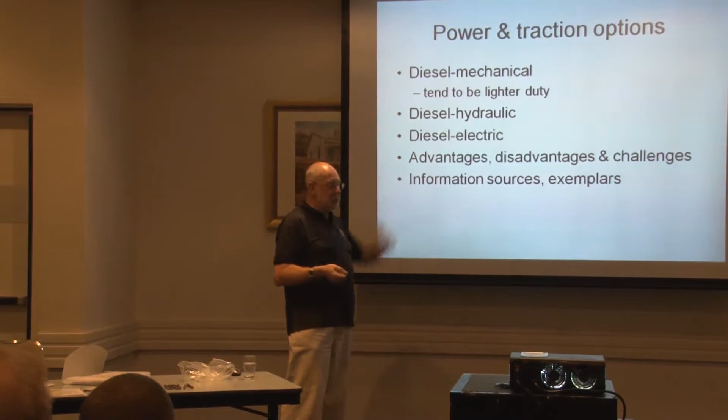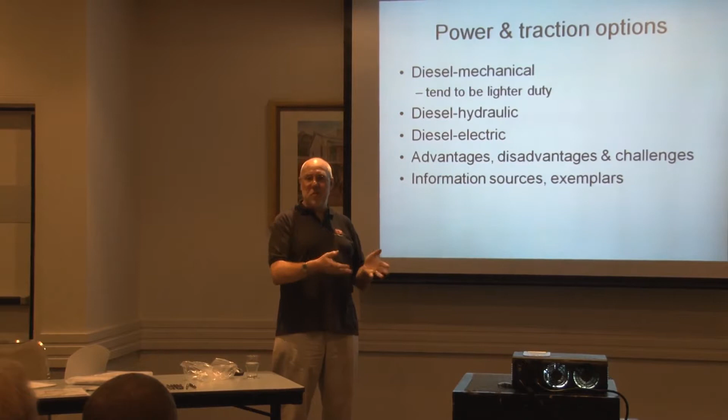On the other hand, on the diesel electric with the electric retardation, you don't have friction heating on brakes unless there's a problem with the hydraulic emergency brake. So it's one less thing to worry about usually, but if you've got fires around the wheels, you don't so much have to worry about the possibility of friction heating on the brakes, because if they've only been running on the electric retardation, there's no actual mechanical contact going on the brakes.

Okay, so some of the challenges. Well, most of the challenges are, first of all, a lot of these things are in remote areas. They're being used in remote areas. They're not accessible to normal firefighting equipment, and very often the only firefighting that gets done on these is by the water cart that has to be used on the site, and sometimes even that isn't applicable because tyre fires are a big hazard with these things, and once the fire gets into the tyres, it's in danger of explosion.

The beads come off these tyres, the big iron beads that go on the wheels, they can go like 300 to 400 metres and kill people. So they usually have a 400 metre or so exclusion zone around it. Once the fire progresses to that stage, they just let it burn out. So immediately we then have a disadvantage or a challenge for the investigator, and the damage is a lot worse than it might otherwise be.

A second challenge very often is the sheer size of the thing. They're generally pretty big, most of these bits of equipment. So climbing around them and getting underneath them and that sort of thing is actually physically very difficult.

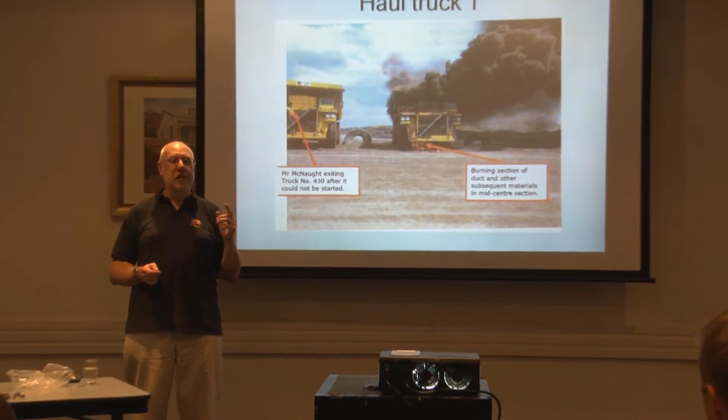What's the sort of average dollar value you're doing? Okay, the average dollar value for these sort of things, replacement cost, most of what we're looking at tonight would be in the region between $2 and $10 million. So the point is that a lot of these companies are running fleets of maybe 50 of these around the world. And if one of them catches fire here, they want to know why. Because the next thing you know they've got 3 or 4 catching fire in other places, and they've got a real problem on their hands. So that's a lot of the reason we get involved. Sorry, I should have said that earlier.

Probably the cheapest thing that you'll see tonight is a prime mover, which would come out around about 200 grand. But mostly, something like this, replacement value on one of these is about 5 million.

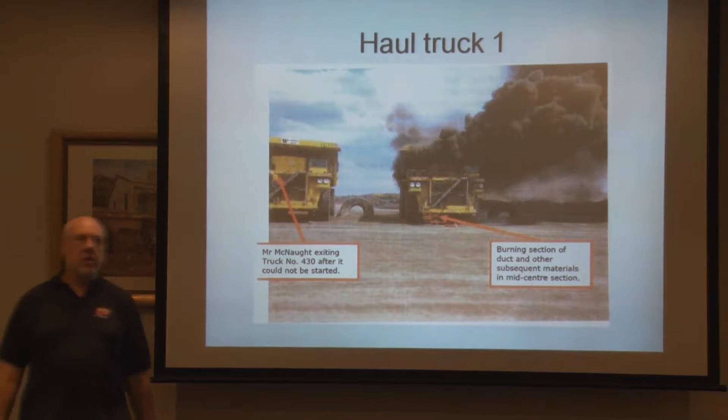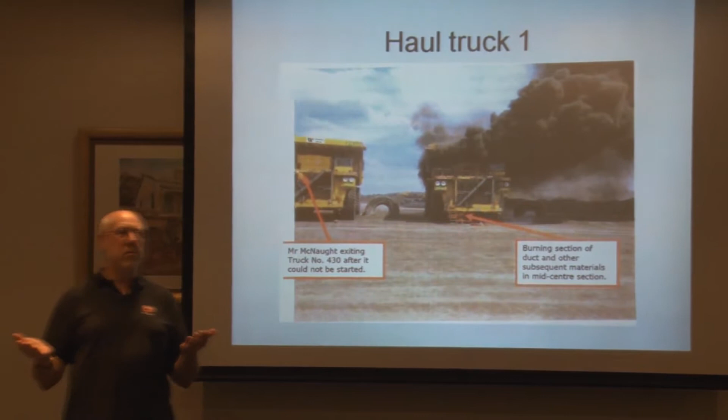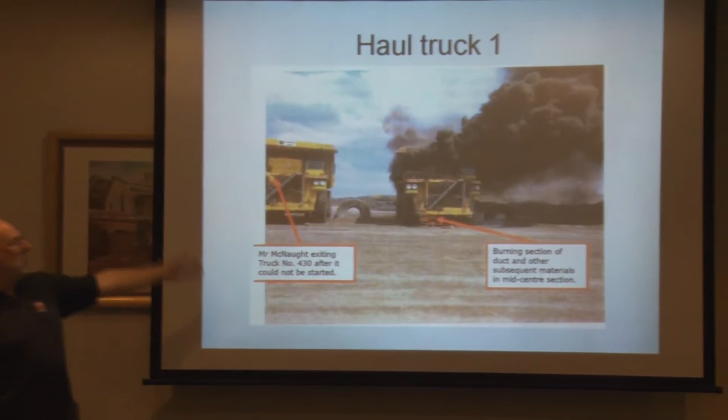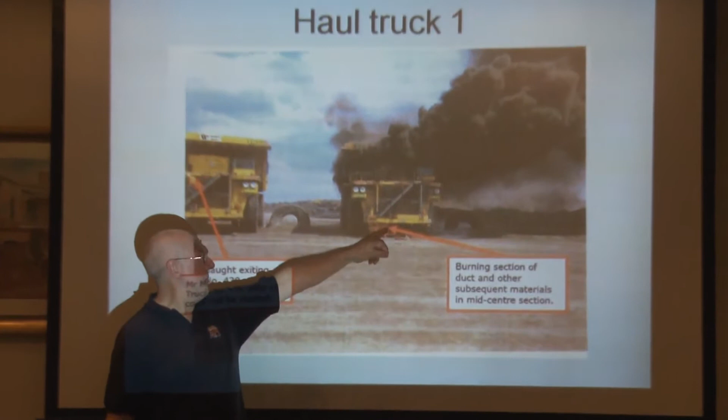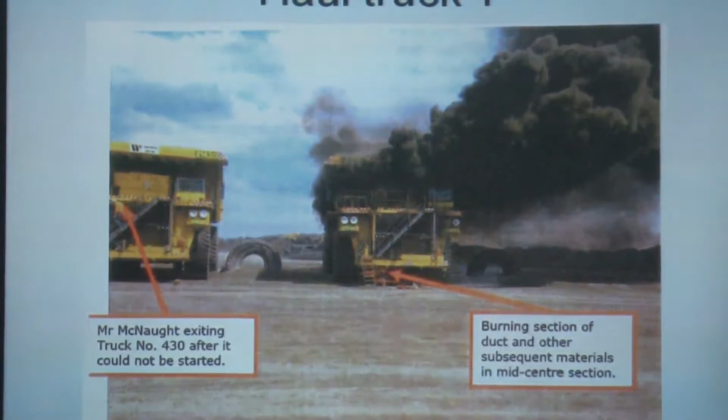This is just an example of the sort of thing that I was saying about getting early photographs. This is put out in an official report. But this photograph was taken by one of the workers on the site about 4 minutes after the fire was first seen on this truck here. I won't go into all the details there. Some of these I've been given permission to tell you about providing I keep them confidential and anonymous. So I can't tell you exactly when or where it's occurred.

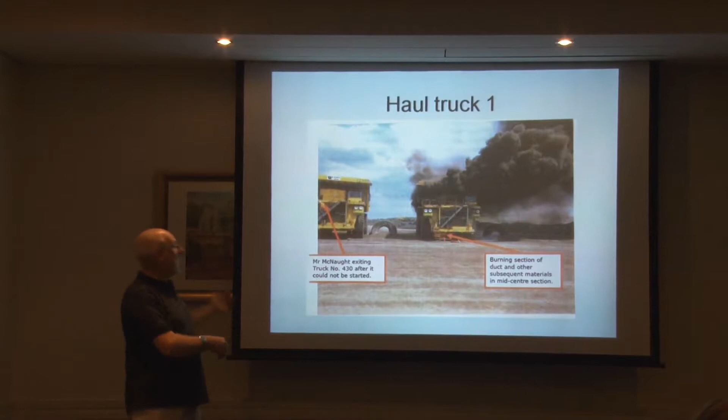But suffice to say, this is what's called a go line, which is where the trucks come up to and they stop, and the operators go on break. While they're on their break, a service car comes up and replenishes the fuel, the oil, everything else that needs replenishing, and then when the drivers finish their break, they come back, get on the truck, and they go. These trucks' buckets carry around about 250 metric tons of rock at a time. So they're a fair size, as you can see.

Now what's happened here is that half of the go line, this one here, has actually been refueled, and then the service truck has moved along to the next one, ready to refuel that one. But in doing so, and putting out hose and everything, a very small fire was seen about halfway back underneath that truck. This is the operator of this truck. He'd already dismounted once, but he went back when he saw this fire. He went back to try and get his truck to move, but it wouldn't start.

Well, there was a very good reason it wouldn't start, because the service car operator had done the right thing, which is what's called lock out. For safety reasons, when you're doing any work on any of this equipment, you have a locking out system. Individuals have individual locks. So the service car operator had done exactly the right thing, which was to lock that out. Of course, that meant he couldn't restart.

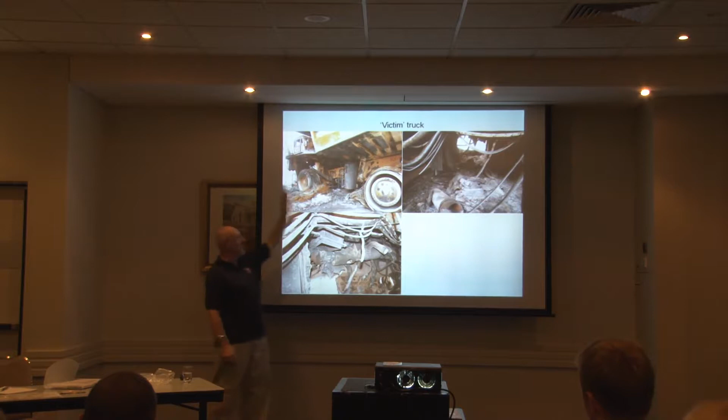This is looking up at that area there, and this here's the back of the generator, and this here is a succession of hydraulic pumps. It's actually two in a line here. This is the impeller with the remains of the shroud on it, and there's two hydraulic pumps. One of those pumps hydraulic fluid for the steering. Not surprisingly called the steering pump. I was amazed by that. And the other one provides the main power for lifting and lowering the tub. Strangely enough, that's called the hoist pump. So, having got my head around the jargon,

I was also able to look at an unburned one, and we're actually looking at the hydraulic pumps from a slightly angled view. But you can see basically what you've got is the system of pumps and pipes and joints and everything, and everything is notorious for leakage on these things. They do their best, but they're working at such high pressures. Typically, these are working at 12 to 20,000 kPa. So it's a lot of pressure.

So we were able to compare another damaged one, one that I knew had been subject to fire damage from outside. And then we went back to our origin truck. I'm cutting a lot out of the story here, as you probably know. By now I've already done 2 days work on something like this.

So this is our truck where we know the fire started. Similar angle to the other one. You can see that the external damage is not that different between the two. It's actually quite similar. But when we get underneath, it's very different. On this one, we had burned ducting but that was lying on top of this lump here, which is melted aluminium.

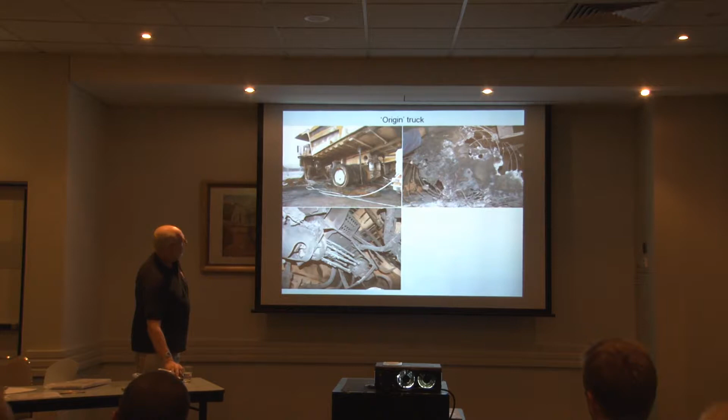So we've got a heap of damage here, which we haven't got on our victim truck. Then the question becomes why. So, cutting a long story very short, this is one of the soil samples taken from behind this truck. And what we found when we analysed this soil sample was that the ground behind this truck, about 5 metres back from the truck, was soaked with hydraulic fluid, hydraulic oil, whereas behind the other truck wasn't.

So that suggested to us we had a hydraulic failure before the truck even comes to stop. So we knew we had a hydraulic leak. We knew that we had a lot of heat going on here at a very early stage.

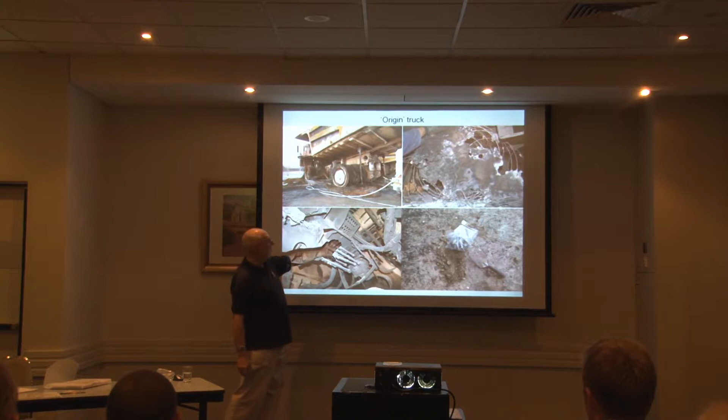And then when we pulled it, we found the impeller, this floating impeller system, and that's basically contra-rotating steel cogs, switching fluid between them, and the whole thing was a complete mess, really mangled in a bad way. So what this told us was that we had a failure, in fact, in the hoist pump.

And when we went back and talked to the operator, he did in fact confirm that having done the tip just before driving down for the break, when the tub was on its way back down, it actually fell, lost a couple of feet, banged on the stops. It's not even supposed to do that. But he hadn't thought anything about it because he was actually going to the break.

So that gave us an idea that probably we'd have a hydraulic failure occur back at that point, which is about 200 metres away, and then driven from there with this hydraulic oil leaking and spraying, because it would have been under enormous pressure and spraying out from various orifices. And with these trucks, you've always got one major heat source, which is always there when they're running, which is a turbo. And as long as the truck's running, the turbo is hot.

One of the things about hydraulic fluid, the engine oil, and even diesel fuel, it's not easy to ignite when it's a bulk liquid, as you know, but if you form it into a mist, as you get under pressure, it ignites really, really easily. Way below its advertised ignition point. So it has an effectively reduced ignition temperature.

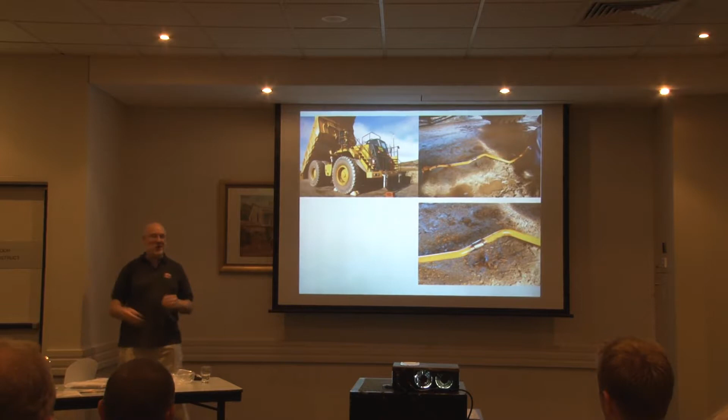And we started to get a crack in the pipe. So we welded a collar around it. And I said, well, didn't it occur to you to inspect all the other trucks? No. But here, on that same one, this is what that clamp is supposed to be like on that end, the one that snapped off on the other one. And when we looked at that one, sure enough, it was starting to crack as well.

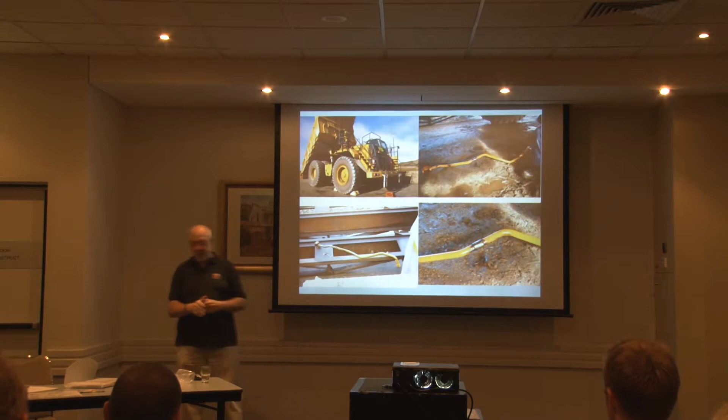So actually, the builders of this machine have done too good a job of the design. They've got rid of the flexible hose, which was prone to failure, and replaced it with the pipe. They never worked out what the stresses on the pipe were. In fact, the consequences were actually much more serious, because normally, if that hose failed, it wouldn't spray the oil and catch fire. But because of the way they installed the pipe, it did. Anyway.

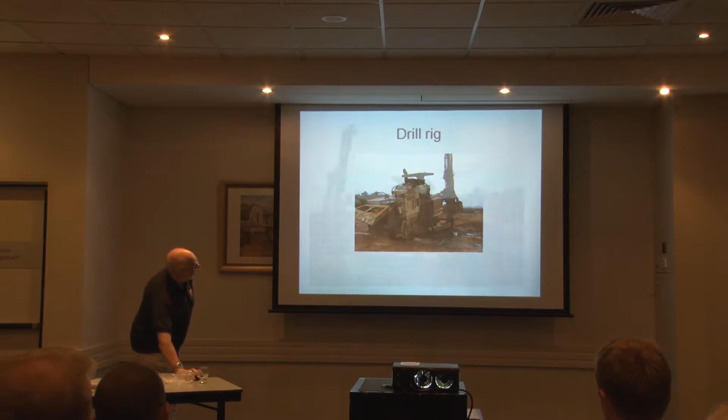Okay, change of emphasis. Sticking with the theme of hydraulic oil, here we go with our drill rig. This is the sort of thing they use for drilling down into the rock to place an explosive shot in order to blow the side of the quarry off. This is a quarry. Pretty badly burnt out, as you can see. Most of the damage is essentially in here.

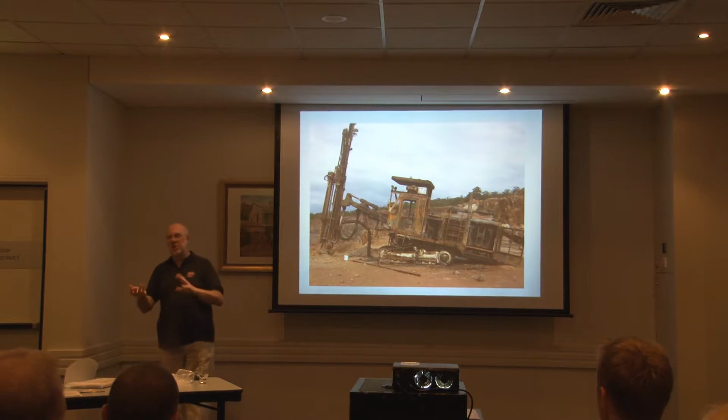The engine sits back in here, the diesel engine. Then you've got your hydraulic pumps here, and all this area here is filled up with hydraulic pipes to do various jobs, and solenoid valves and all sorts of control equipment. And basically it drives this bit at the front, which is actually what shoves the drill into the ground. It's probably got a technical name, but I don't know.

So we're looking into that side door, and you can see you've got this tangled mass of hydraulic hoses. Now, if you've ever seen heavy equipment like this working, you'll see all the hoses are pulsing and moving all the time, jigging about, bashing into each other if they're not restrained. And this thing was an absolute rat's nest of hoses. I've never seen a piece of equipment like it. In most pieces of equipment, they make some attempt to lay it out neatly and restrain it somewhat. Not this one.

So these are our hoses. When we look down at the bottom of that section here, these are all very badly damaged hoses. But can you see this running through there? That's a 24-volt DC electric cable that runs from the batteries to the starter motor. For some reason, the battery is at the front of the machine, and the starter motor obviously is back at the engine. Interesting piece of design.

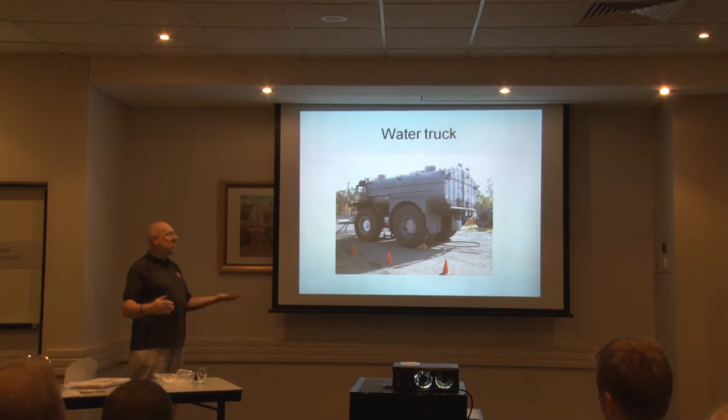So this one's had a fire. And as you can see, the fire's gone on somewhere down in here, in this area here. And underneath there, that's where the engine is, obviously. So looking down here, this is the view into the driver's cab. The driver's cab is pretty well burnt out. The heat will come up through the floor of the cab. And now we're looking down this side of the cab into where the engine is.

There we go. This is looking on top of one of the V configuration engines. And so you've got two sets of two rocker covers on each side. And this is the right side rocker cover. And you can see it's got a large hole melted in it just there. The rest of it is reasonably intact. So here's our hole, the position of the hole in the rocker cover. And just down underneath you can see where all the aluminium has melted and washed down onto the exhaust manifold directly beneath.

If we look, this is the bottom of the exhaust manifold here, and this is the bottom of the exhaust manifold here. Underneath here is where the oil filters normally sit. It's a series of three oil filters that normally sit in there. But they've gone on this one, they've actually dropped off because the aluminium fittings were melting. So they've dropped off.

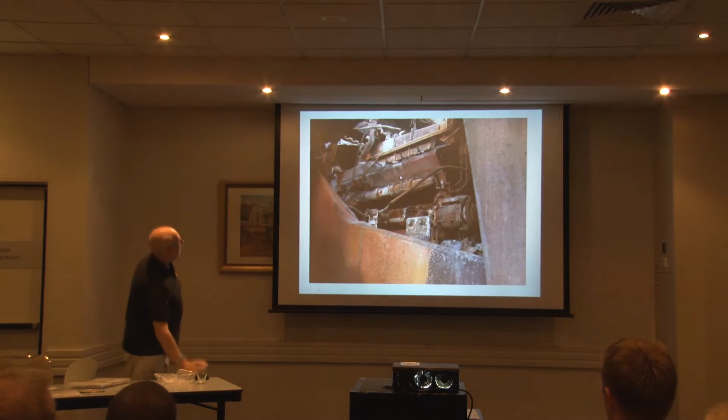This is a bit of a longer shot, but you can see, hopefully, here's our section of rocker cover missing. Here's our exhaust manifold. This is where our oil filter would normally be. And you can probably see this is the area where it's damaged. So the question was, well, what's there to ignite? Normally nothing much. Might be some oil. So I'm thinking possibly at this stage, maybe one of the oil filters is loose and the oil is spraying up under pressure. That's a possibility. The exhaust manifold surface would probably be hot enough that close to the cylinder block to be a good ignition source for an oil spray. So maybe that's the answer.

So fortunately, I had another one I could have a look at. So here we're looking at the same area. Here's your rocker cover. This is your exhaust manifold, and here's the filter. So that's the filter which was missing on the one we looked at. That had already fallen on the ground. So yeah, it would be possible maybe for a spray from here down there, but would you expect this damage up above it? So I was thinking, what explanation is there? I noticed all this black stuff around back here.

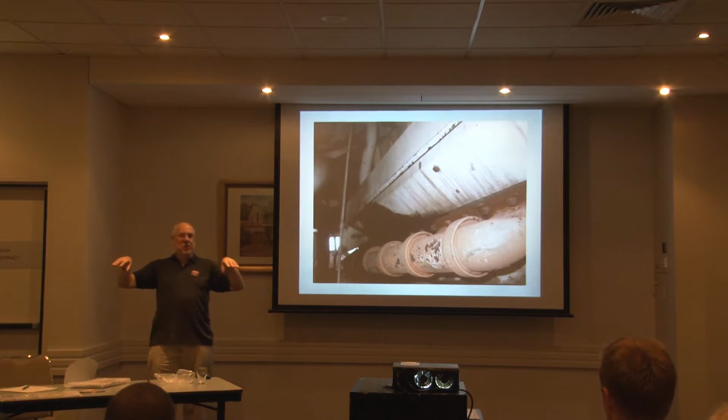And when I talked to the fitters, and this again is the value of talking to people who work with these things, they said, oh yeah, this type of engine is absolutely notorious for oil leaks in this area here. This joint, which is the rocker cover joint, and here, it's absolutely notorious for oil leaks. That oil runs down on top of the exhaust manifold, where it gets really, really hot. If you then add in the fact that this is working in an environment where there's constant coal dust in the air, sticking to the oil, you can imagine the sort of thing that happens.

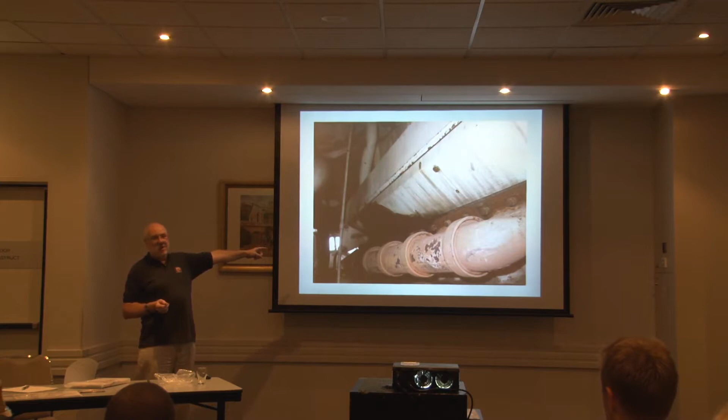So they had a regime in place of washing these down once a week to stop this build-up. This engine was washed down two days before that photograph was taken. The one that I showed you that caught fire was due for its wash the following morning. So they increased the frequency of the washing to about every three days, I think. You know, to me, the obvious thing to do would be to do something to stop the oil leaks on your engine.

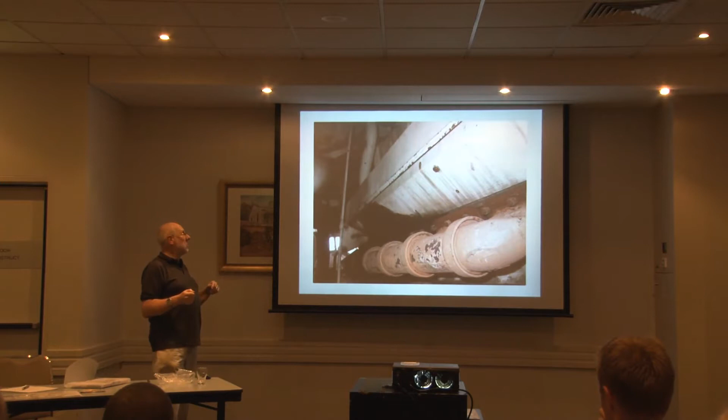If you get a fire that starts somewhere else, or flashes from the turbo back to somewhere else, which is what about nine tenths of these do, then the suppression system won't be there. They may operate, but by that time it's somewhere else. So that's an area we get involved in quite a bit, advising them on how they might redesign their suppression system.

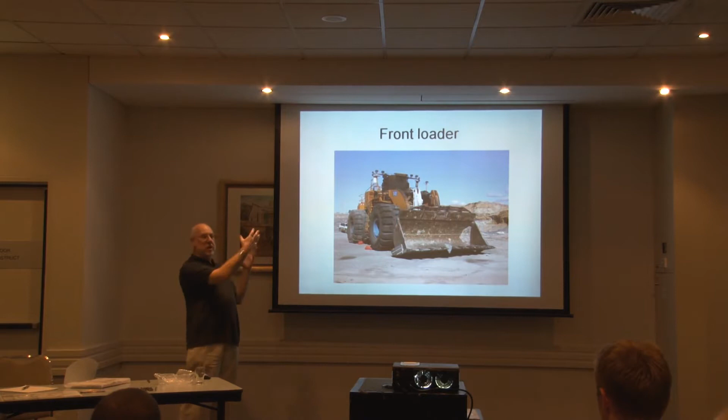Okay, this one here is a slightly different situation. It's a front loader, but it's articulated, so the front bit moves side to side. The engine and all the driving bits are at the back, and the bit in the front with the bucket moves side to side. That's a terrible picture of it from side on. To your right is the front part, which steers, with the bucket on. To your left is the engine part, and there's no prize for guessing which part the fire's on, because we've got all this down here, along the hoses, and follow it here.

Now that's interesting in itself, because that's the end that doesn't have a diesel engine in, doesn't have a hydraulic pump in. So what is in there to actually cause the fire? Just looking back into the engine bay to show you there's not much damage in there. Now, in the front section, there's one of these: a hydraulic manifold. It distributes the hydraulic fluid under pressure between different services. Fitted under these Christmas trees. There's obviously much worse burning around a couple of these than there is around any of the others.

There are some splash marks here, spray marks. So we started looking in this area, and what we found was in this one there's actually a slight gap. We had a failed seal in there. You see the gap here, and you can see that the seal broke on top there. So we actually had a spray of hydraulic fluid. Normally all that should do is cause a loss of fluid and one of the functions of the machine not to work properly. Why did we get the fire? What ignition sources do we have?

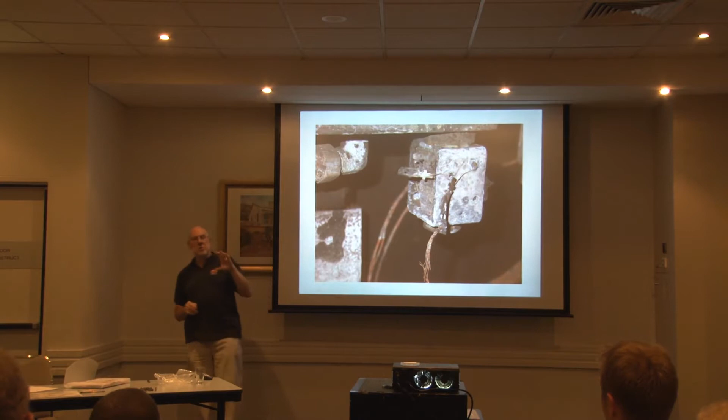So what happens, let's say for the sake of argument, that has failed in the open position. So in other words, the solenoid valve is being held open by the current. What would happen then? Well, the bucket would keep dropping, and the solenoid would get hot. Okay? Next question, how hot would the solenoid get? So they gave me a brand new one from their storeroom.

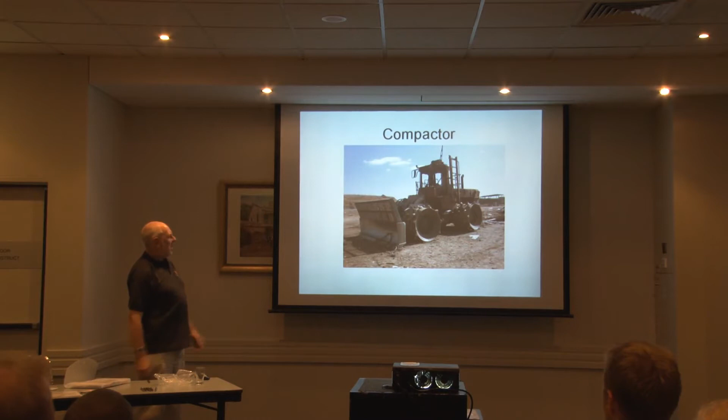And bear in mind this thing works on a landfill. So we've got this massive material, right above it is this big rotating shaft. And of course everything that is thrown on the landfill is thrown up and gets trapped around this rotating shaft. That's the sort of material that had rags and paper and all sorts in there, so that's just a ball of it. So I was pretty happy with the friction heating on that rotating shaft.

But the other thing that I managed to catch that I might not have really thought of before, because people throw out chemical containers and things like that. They actually had fires starting when they ran over pool chlorine bottles that people had thrown out, plastic containers that still had some chlorine in them. The chlorine gets up into the belly pan and reacts with all this muck. So you can get fires starting that way as well. They made a change from the hydraulics.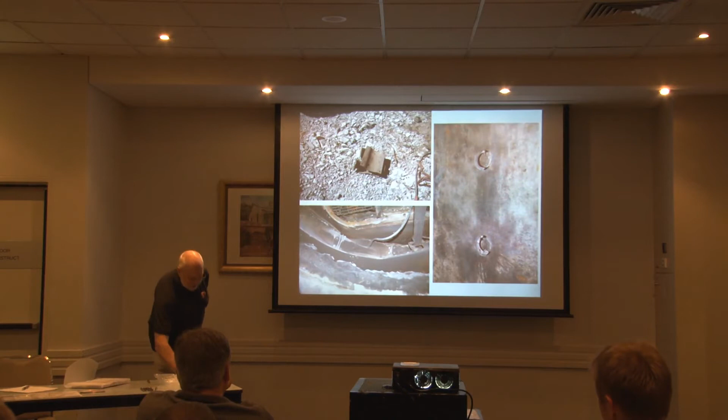Okay. Who's come across cotton pickers? No? Yeah? Well, normally, in most common places, for cotton pickers they actually get a basket fire. Because what they do is all that cotton gets thrown up in the back of the picker, and then they get a stone or something, and a hot fragment goes flying up in the same lot, and then 3 days later down the paddock, they see smoke coming out of the basket. This cotton starts smoking. This was a little bit different.

The fire wasn't up here, and around these heads either. It was inside this area of the picker, just behind the cab. We did have a bit of damage around the front of the turbocharger. There was a bit of blistering there. But that was actually later explained in terms of the way that the fire developed and some material falling into that area.

What we did there though, back here, so the engine's here, and you look back, where the batteries are. And you can see what you've got here is the main battery cable running up here through this clamp, just an ordinary cable clamp. But it's just there, there's no sign of any rubber, plastic lining or anything like that. So we went back to the local dealer, and looked at a brand new one in the workshop. Sure enough, it was just a bare metal clamp around the battery cable, which also had wiggle room.

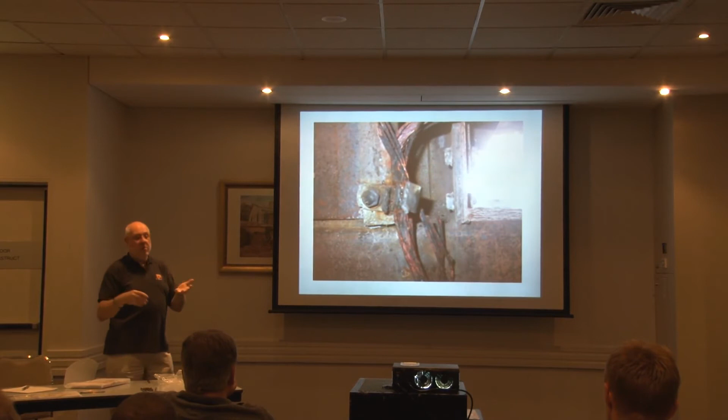And you can imagine the vibration these things get. Everything's banging around. This one had done about 300 hours since the previous service. So it was just waiting. And as a result of what we found on this one, and when we looked at the one in the importer's sales group, they actually issued a recall on this model machine, and they fitted a rubber grommet around the cable through that.

Was there any arcing down there? Yeah. Just go back, you can probably see it on the actual... that's the lug at the end of the lead.

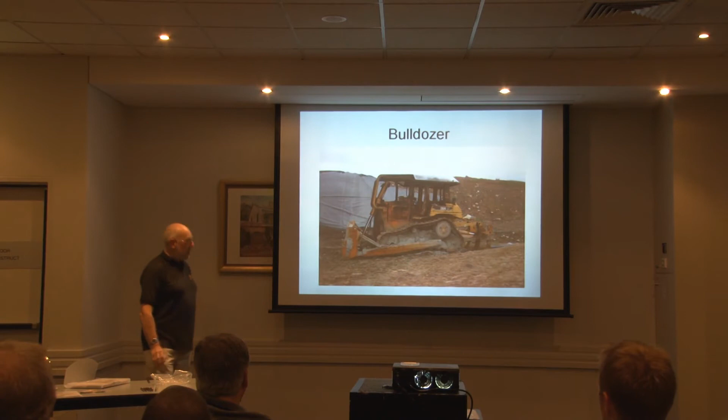We've got quite a bit of burning in and around the cab of this one, but not much anywhere else. So we're burning in here. Right, the engine area is not too bad. See, this is the engine. See, all these diesel injector fuel lines are all right. So look at the other side of the engine, and all the damage has come from the outside into the engine, whereas the cab is completely burned out. Right side. That was a bit strange.

The circumstances of this one were that the guys were workers for the subcontractors. This guy turned up to work at 10 o'clock in the morning, and there was absolute torrential rain. They couldn't do anything on the soil, so they had to leave it because of the rain. And then about 6 o'clock that night, still in the torrential rain, neighbours reported this on fire in the middle of this land reclamation project, nothing around.

Neighbours reported this on fire, the fire brigade goes down, got 2 trucks bogged down, and the next morning, by an amazing coincidence, another bulldozer owner-operator turned up and said to the boss, I think you had some trouble. Do you need another bulldozer?

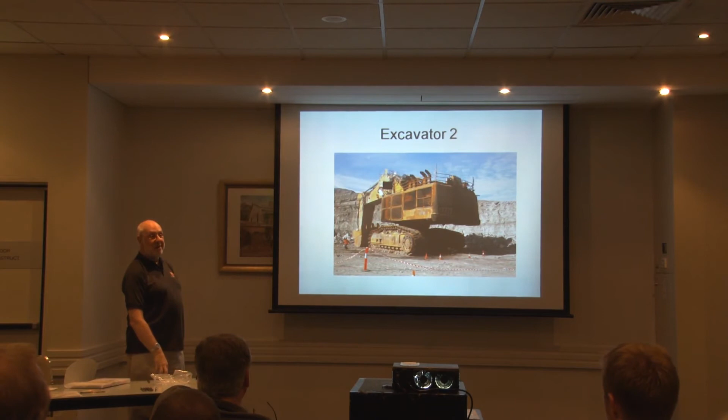Do you want to finish? All right, keep going. Yeah, okay.

All right, so another excavator. I'll point this one out for Willie. Okay, so this one, that's not actually running away, it's just trying to get out of my camera shot. So this is another one of these excavators. And what we had was, again, all the fire is up in this area up from there. Got a lot of burning all over this area here from the top.

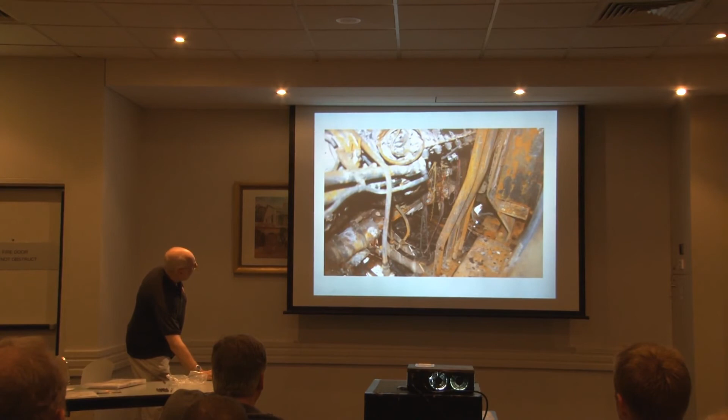And when we look down into that from above, this is the side of the engine. We've got this part of the front cover here. And if you look down here, you've got all the damage in this area where the wiring is. So it's a bit closer. Now, because it's such a big engine, it's got 2 starter motors to turn it over. So you've got 2 starter motors here. And then you've got a bit further back.

There we go. A bit further back is a prelube motor. So the idea is that when you start the engine up, this is a big engine, this thing spins round first and pumps the oil pressure up before the other 2 kick in and start turning the engine over. Otherwise, you'd be turning a dry engine. It's much harder than it should be.

That starter motor is actually jammed, completely jammed solid. One of the issues we identified with this was that the cable they used for the starter motor supplies from the battery was 75 square mil cable, which was actually not enough for the rated cranking current when you start these engines up. So the manufacturer was actually putting on cable rated too low for the job with respect to the starters.

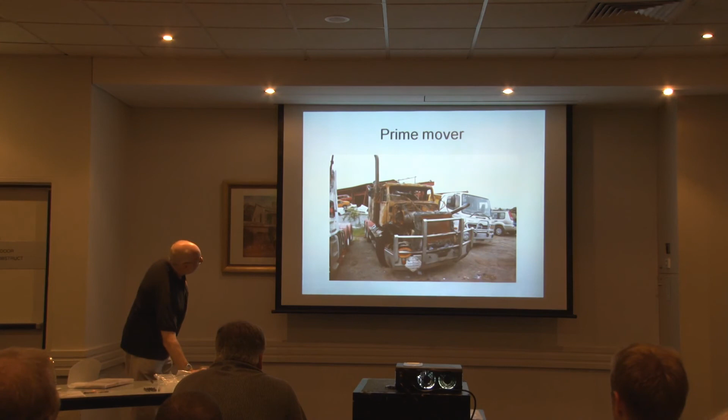Okay, very briefly. This is more typical of the sort of thing you probably come across every day. This is a prime mover, a typical prime mover for a road train. A lot of damage here around the engine, as you can see. It's worse on this side. And if you look here, this is the turbocharger up in here. So the exhaust comes out the side of the engine here, comes up to the turbocharger, and goes out to the exhaust system here.

And that's the next one to it, and that one runs up to the top of the turbo. You can see this position here. This one is only that far off from the turbo outlet. So once you start to spray oil on it, it's just a simple fire.

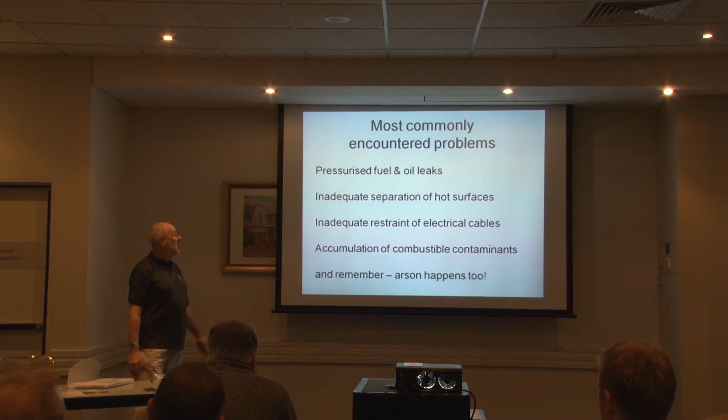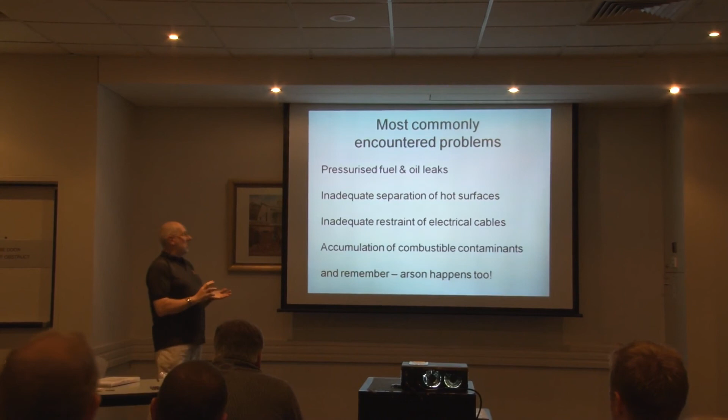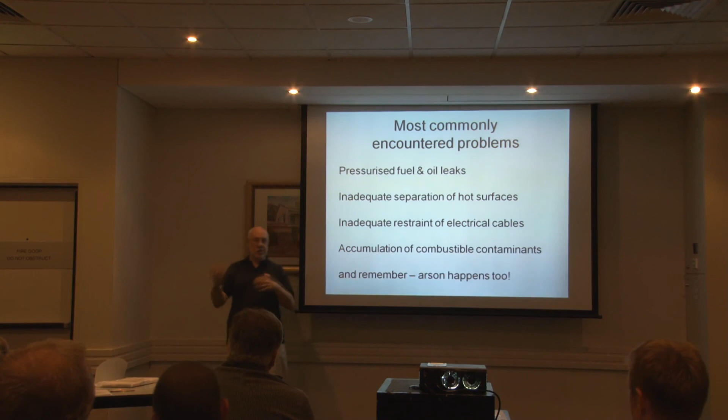So summarising, most of the things that we come across can be pretty much summarised as this. Most of the fuels come from pressurised fuel and oil leaks. A lot of the ignition sources are involved in inadequate separation from hot surfaces. Now, I've already mentioned about lagging. Some people put the lagging on there, and it will actually stop the ignition of diesel or hydraulic oil. If they put a physical barrier in there, that will act as a solid barrier.

Inadequate restraint of electrical cables is a classic you see over and over and over again. Accumulation of combustible contaminants, so that was the compactor and also the water truck having the oil and coal dust gathered around the exhaust. And of course, we still get arson as well.

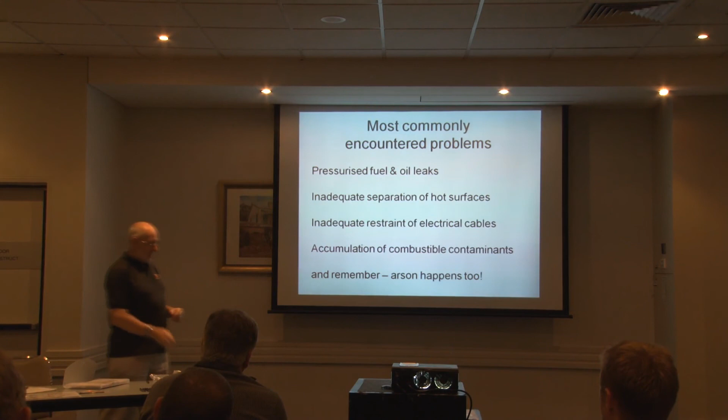Are you seeing any change in the machines as a result of your manufacturers taking it on board? I'd have to take credit and say that, I think as things happen around the world, yes, they do. Yes, I think they do. The machines are getting more reliable. I think that's fair to say.

One of the problems that we'll probably see in the future is how much higher level automation is on them now. So it's much more electrical and electronic equipment than they ever used to have. I'm just waiting for the first one on the driverless one. Because who's going to report it? You can be out there in the field with a burning light. Nobody even sees it. There's nobody there.

Anyway, I'll just wait. Was there any particular country where the manufacturers that the problems seem to come from, that has a lot to do with the slackness where they put it in? Well, there's really only probably two countries that actually manufacture this equipment. And they buy a lot of the components from another country. But the two countries that build most of it are the USA and Japan. And the country that supplies all the components is China.